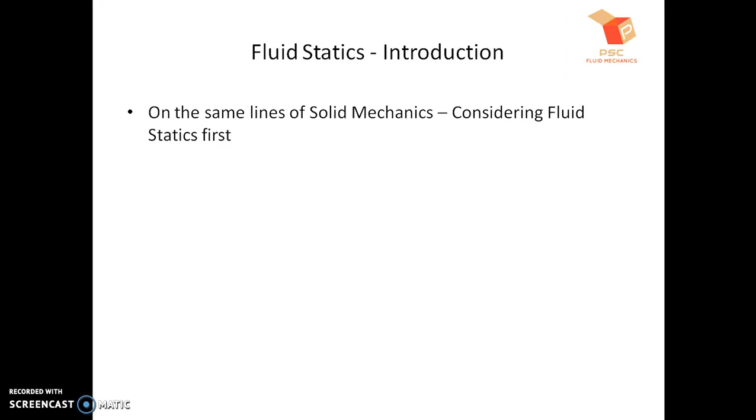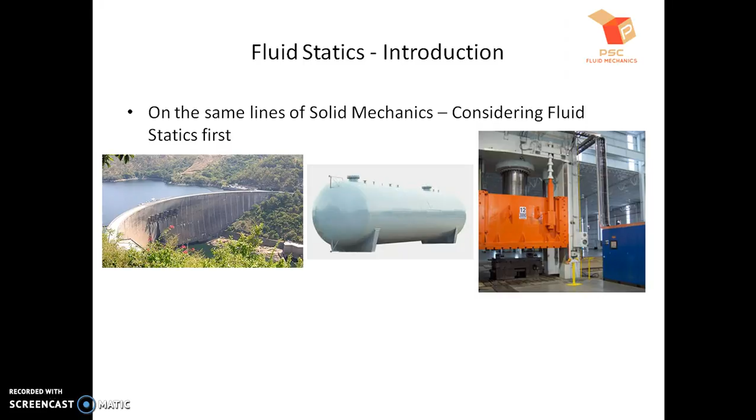The design of many engineering systems such as water dams, liquid storage tanks, hydraulic presses and many more requires the determination of the forces acting on the surfaces. You can see here a dam wall and a fluid at rest is present here. So this fluid at rest exerts some force onto this dam wall and this force has to be calculated. Similarly, in a liquid storage tank and in hydraulic presses we have liquids at rest, and these liquids, as they interact with the solid boundaries, exert some force onto them, and these forces have to be determined.

The determination of the forces exerted by a fluid at rest on the solid boundaries is done with the use of principles of fluid statics. And under the domain of fluid statics, we are going to learn about how pressure varies in a static fluid. We are also going to learn about forces on submerged planes, and a very important one we'll be learning is the concept of buoyancy and stability.

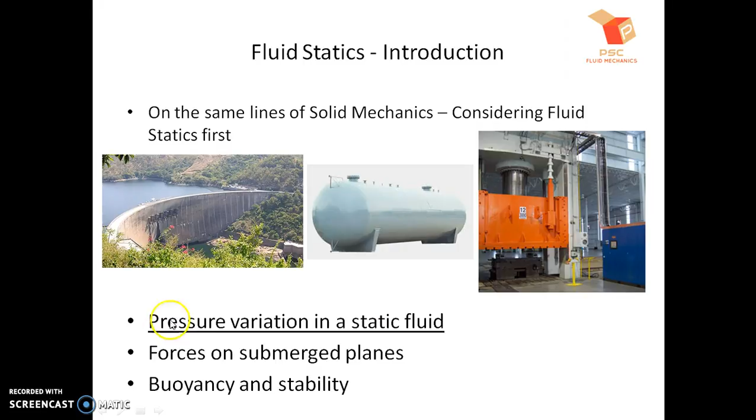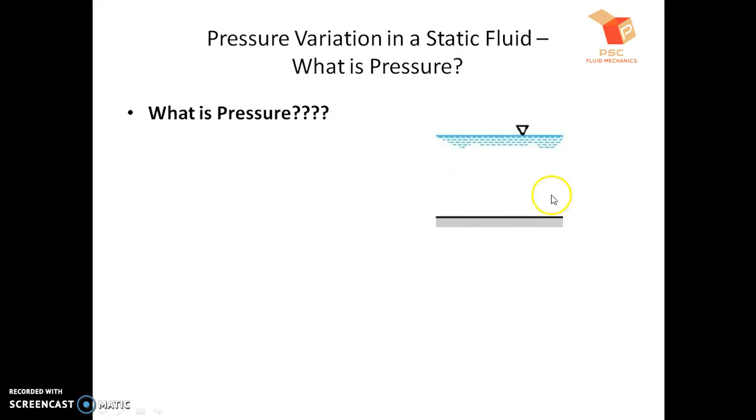Now first we'll talk about pressure variation in a static fluid. Before that, we should understand the meaning of the term pressure. So to do that, let's consider a large expanse of a fluid at rest, and one small fluid element we are considering within this large expanse, taken in isolation. So the fluid element we have taken outside, so it is isolated now from this fluid system, and now we can determine what forces act onto it, and once we understand the forces acting onto it, we can draw a free body diagram.

So on this fluid element, basically two types of forces can act. The first one is a body force and the second one is a surface force. Now what is the meaning of the term body force? Body forces are those which act throughout the mass of the system. So here we have a fluid at rest, and throughout the mass of this fluid, the gravity forces are acting. So gravity force can be considered as a body force. Similarly, if we put this fluid element in a magnetic field, the magnetic forces will act throughout the mass of this element, and it can also be considered as a body force.

But when we are talking about fluid at rest, we are considering only gravity forces, and hence the body force acting on this element is a gravitational force acting in the vertically downward direction. Now in addition to this, one more force is acting which is known as surface force. This fluid element is surrounded by a large number of fluid particles which exert force onto its surfaces, and this force is known as surface force. Now these forces can act in two different ways.

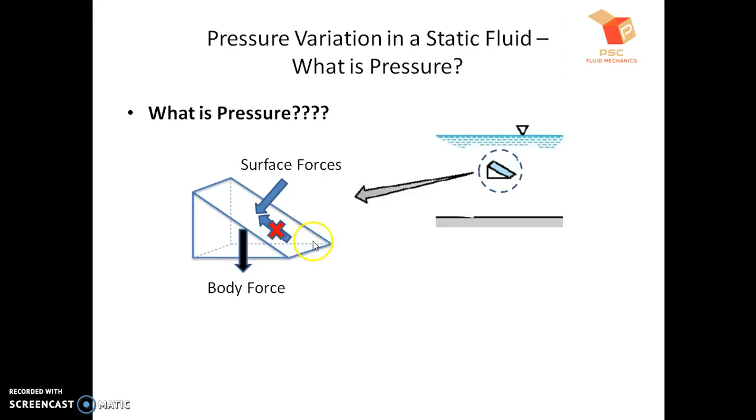We know one term known as stress, which is defined as force per unit area. Similarly, we can define normal stress as normal force per unit area. So here the normal force is acting onto this area, which gives normal stress. But this normal stress, in case of fluids, is known as pressure. So pressure and normal stress are synonymous terms, but we use normal stress when we talk about solids, and when we talk about liquids or gases, we call it pressure.

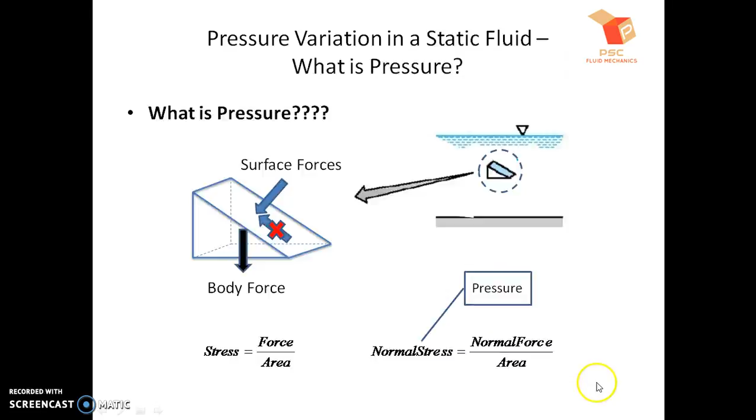Now as we understood the meaning of the term pressure, we should understand how the pressure varies in a static fluid. So if we consider a large expanse of a fluid at rest, the pressure can vary with direction at a point, or it can vary horizontally as well as vertically.

So let us consider a point here, and at this point the pressure will be acting from different directions. So this pressure which is acting from different directions can be different, or it can be same. Similarly, along a horizontal plane also the pressure may vary, as well as in the vertical plane also the pressure is going to get varied. So this has to be determined. How does pressure vary at a point with respect to directions, then along a horizontal plane and along a vertical plane?

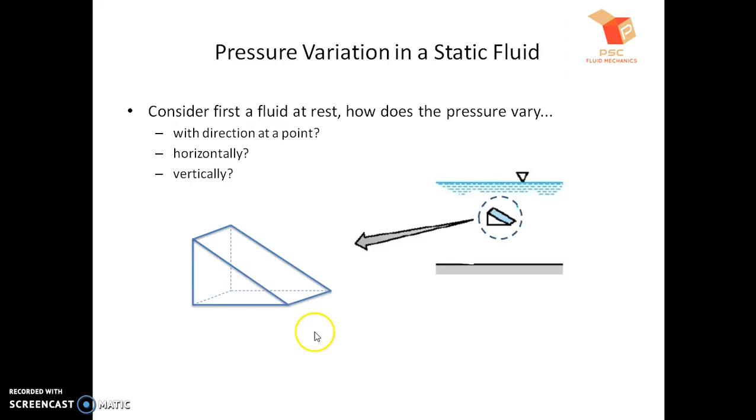So to do that, we'll take one small fluid element in a large fluid system which is at rest, and we'll take this fluid element in isolation. We'll take it outside, and now we'll draw a free body diagram for this element. So the element is taken outside, and now we'll define this element with the use of a Cartesian coordinate system. So in this direction we have x coordinate, in the vertical direction we have y, and in the third direction we have z coordinate.

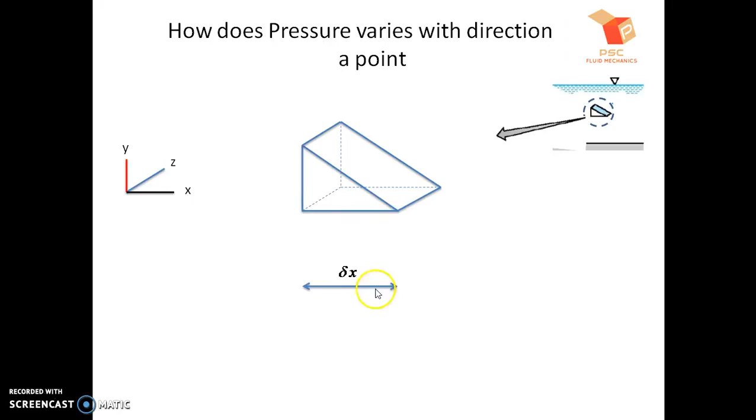And now accordingly we'll define lengths of this element. So this length in the x direction is delta x, this height or length in the y direction is delta y, and this length in the z direction is delta z. This arbitrary inclined plane surface we have, and the length of this inclined plane surface is defined as delta s. Now we are going to identify the forces acting onto this element. So we know there are two types of forces, surface force as well as body force.

Now first we will go through the surface forces, and we know surface forces are the resultant of the force exerted by the surrounding fluid particles, and we are considering only normal forces. So on this left plane, perpendicular to it some force will act. Similarly, on the bottom plane, perpendicular to it some force is going to act in the y direction, and this plane is an arbitrary plane. So perpendicular to it means it's not along x, y or z, it's in an arbitrary direction. So we'll denote this direction as n direction. So perpendicular to this plane also the force is going to act.

We can resolve this force in horizontal as well as vertical components later on. We have identified the forces acting perpendicular to the plane surfaces in the x direction, y direction and n direction. Now what is the amount of this force? Pressure is force per unit area. Therefore force is pressure into area. So in the x direction, pressure acting is Px multiplied by area. This plane area is delta y multiplied by delta z. Accordingly, Px into delta y delta z is the force acting onto this left plane.

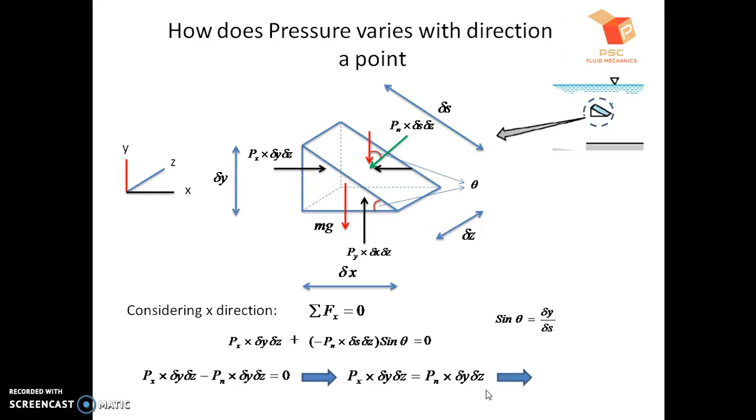Now similarly, we'll apply the equilibrium condition in y direction. So equilibrium condition in y direction is summation of forces in the y direction equals to 0. Now we'll identify the forces acting in the y direction. So first one is this body force, which is acting in the vertically downward direction. So we'll consider downward negative and upward positive. So it is minus mg.

This Py into delta x delta z, it is acting in the vertically upward direction, so it is positive. And this component of the normal force, it is a cos component, which is acting in the vertically downward direction, so it will be a negative component. So writing in the equation form, that is Py into delta x delta z, it is positive, plus minus of Pn into delta s delta z cos theta.

So this Pn delta s delta z component is vertical, acting in the downward direction, so that's why it is negative. And mg, it is vertically downward, that's why it is with a negative sign. So plus minus mg equals to 0. Now solving this, what we will get is Py delta x delta z plus minus of Pn delta s delta z cos theta, we'll keep it as it is.

And now we'll identify what is the equation of this mg, that is weight. So as we know, density is mass upon volume, therefore mass is equal to density into volume. So I can write it as minus rho V into g. So minus rho Vg is nothing but density into volume multiplied by acceleration due to gravity. So V is the volume of this element, and what is the volume of this element? It's the area multiplied by length.